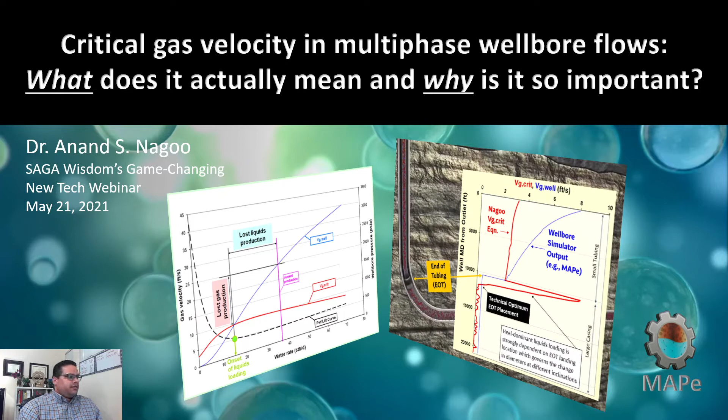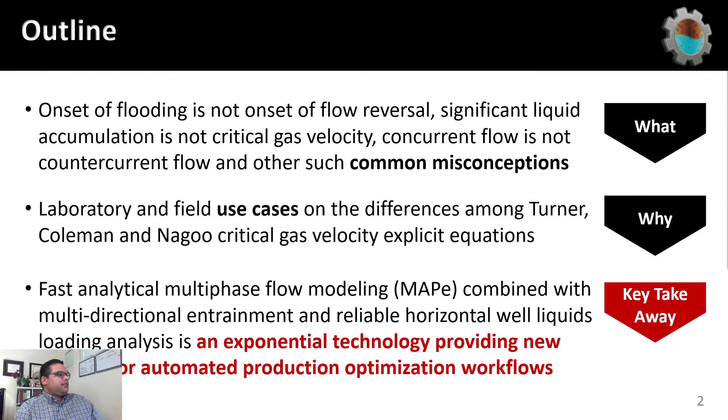For the first part of the talk, I'd like to focus on some common misconceptions about critical gas velocity, then transition into why this improved understanding is important, and conceptualize and validate our understanding with some key experiments and field data validations. Finally, I'd like to introduce you to the tool that does all these calculations of multi-phase flow, production calculations, critical gas velocity and so on, the MAPe tool, and why it's an exponential technology for providing new insights into production optimization workflows.

I often like to step back and look at the prize of what we're trying to do here. In production engineering, we think about this world in terms of the latitude and longitudes of pressure and flow rates. What we're really after is finding that pressure profile along the well, those individual multi-phase flow characteristics along the well. Particularly in unconventionals, we're interested in things like slugging, critical gas velocities, holdups and so on.

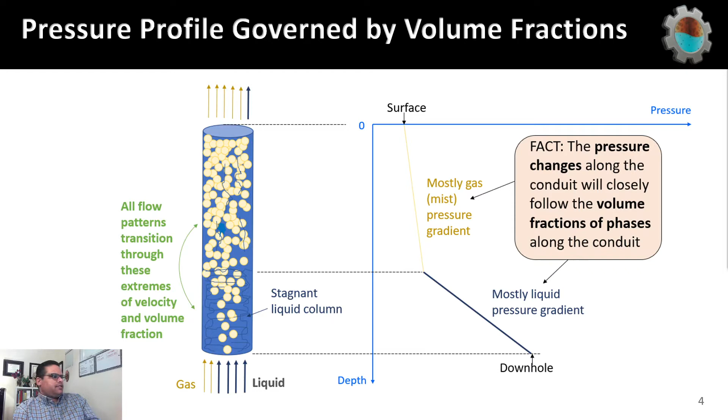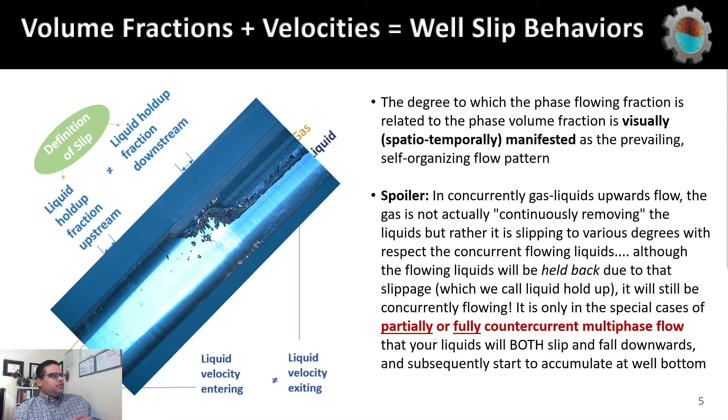But if you think about what the pressure profile in a well really is, it's nothing more than a representation of what you have in the well, the volume fractions of the phases. All your flow patterns are just different manifestations of that. So the pressure behavior is governed by the volume fractions, and the volume fractions together with the individual phase velocities, that relationship is what we call the well slip behavior. That's the key thing causing you to see different flow behaviors in the well, whether it's slug flow, annular mist flow, and so on, and that's visually represented in the type of slip that you have.

Now the problem is there's a misunderstanding, in my view, of what's actually happening. When we think about concurrent multi-phase flow, the gas is not actually removing the liquids. What's actually happening is there's constant slipping between the gas and the liquids to various degrees, which we call different flow patterns, and we call that holdup. The liquids are held back due to that slippage in concurrent flow. But in countercurrent flow, when you have partial or full countercurrent flow, you have both slipping and liquids falling back downwards. That's a key difference, because you need a deep understanding of the two different types of wellbore slip behaviors, characterized by concurrent flow and countercurrent multi-phase flow.

This is really where we must start to understand critical gas velocity, because you cannot truly understand the concept of liquids flow reversal without understanding the differences between concurrent and countercurrent multi-phase flow. There's a large body of literature on both, but we tend to see more of the concurrent part in the petroleum industry, and this is what has always been missing before, a key source of misunderstanding.

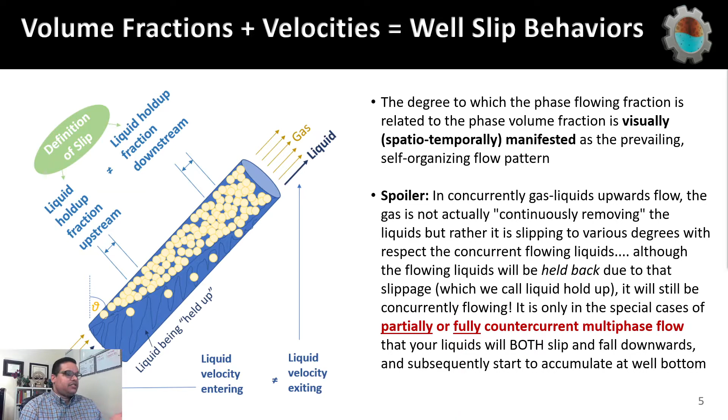When we talk about concurrent or countercurrent multi-phase flow, we're always talking about liquids accumulation. But in concurrent multi-phase flow, liquids accumulate in all sections of your well, and you have this phenomenon of liquids being held back due to slippage. So you have liquids slipping but not falling, with both a positive liquids rate and a positive gas rate concurrently, and that's how you develop a holdup profile.

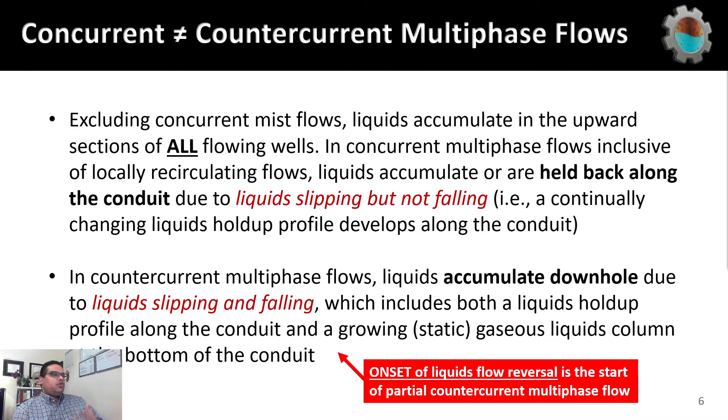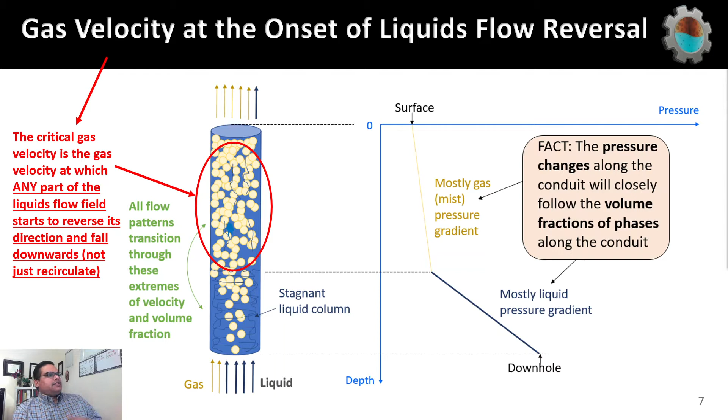So now that we understand that, we can finally come to an accurate definition of critical gas velocity, which is a gas velocity at which any part of your liquid's flow field starts to reverse direction and fall downwards, not just recirculate. So we're talking about falling downwards, a gas velocity at the onset of liquid's flow reversal. But even that is open to interpretation, because what are you talking about? What do you mean any part?

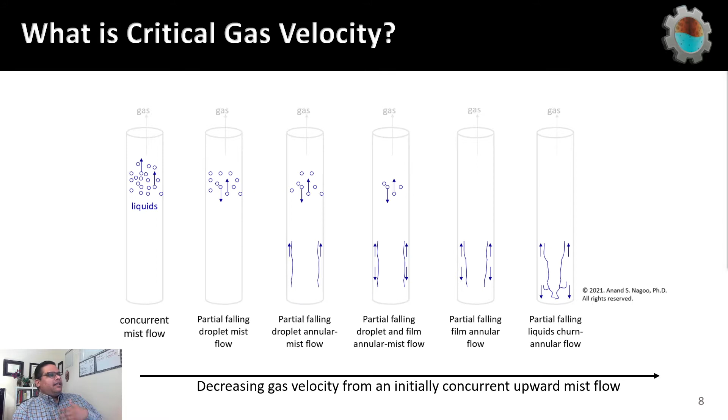If we start from a concurrent mist flow and we start decreasing the gas rate, we're going to countercurrent multiphase flow in many different ways. And the question is, are we talking about a partial fall in droplet mists? Are we talking about partial fall in annular? Are we talking about a mixture between? And the answer is the critical gas velocity is all of the above.

It's a range. Contrary to popular belief, it's not a departure point, but a range, a wide range. It includes all of the starting options for countercurrent flow. And the critical gas velocity depends on the different types of wells that you have. So, for example, a high GLR mist flow well will flow in this regime, but a liquids-rich gas condensate would flow in a partial churn annular flow regime.

And the critical gas velocity is the onset, that point just before you transition to your zero cross-section average net liquid velocity. And then your liquid starts to have a net zero velocity, a net negative velocity. And all of this happens in multiple ways across a wide range of different transitional flow patterns.

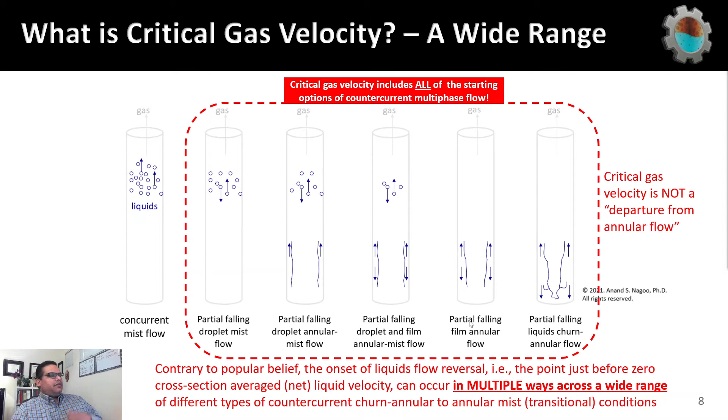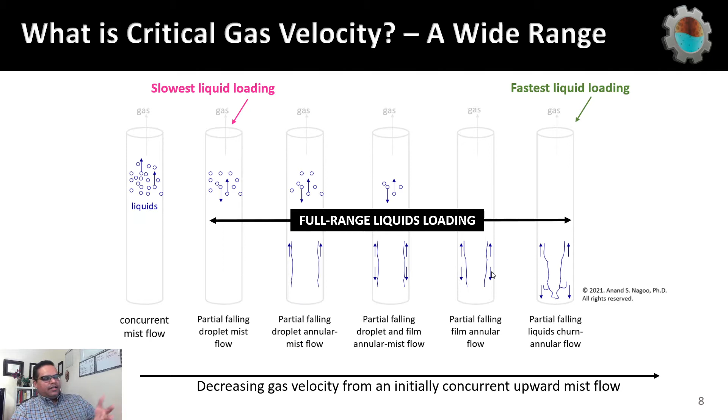That's important because now we can finally understand why we have slow liquid loading in some wells, and why we have sudden, fast liquid loading in other wells. That means we're accounting for the full range of liquids loading, an important term because it's an important differentiation into what we understand by liquids loading. So it's not just about what happens in a Turner analysis, or what happens individually in a film analysis, but it's the full range of this wellbore behavior.

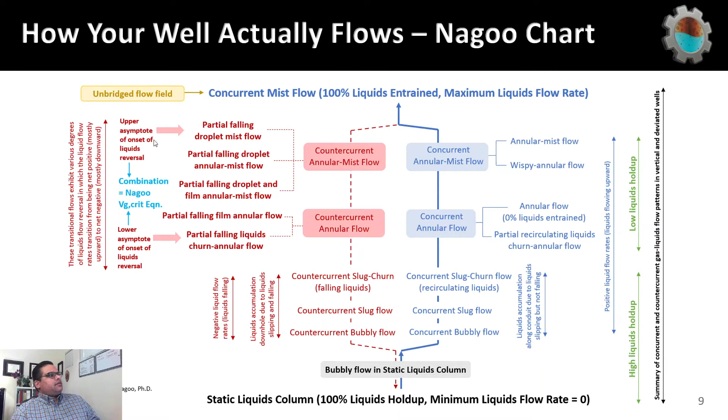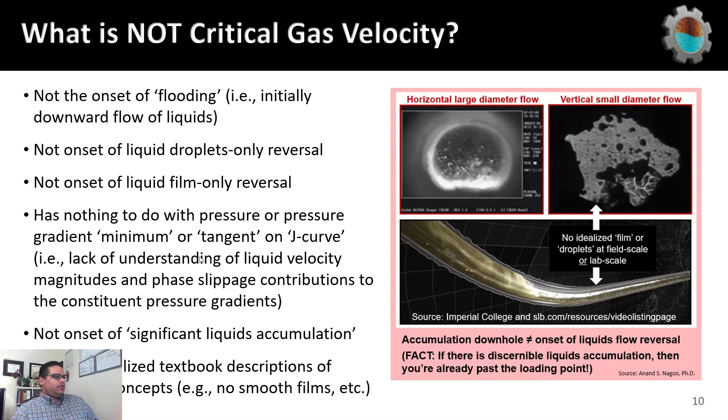The difference in the understanding that I created in the critical gas velocity model I have is that we're able to combine that full range. We're able to capture that full range and look at the upper asymptote of liquids loading and the lower asymptote, and combine them. So now that you understand what liquid loading is, you can clearly say what it is not. It's not the onset of flooding. It's not the liquids droplet only. It's not the liquids film only. And it has nothing to do with the change in pressure gradient curve or liquids accumulation, because once you have accumulation, you're already past the liquids loading point.

So now that we understand what liquids loading is and the onset of flow reversal in countercurrent multiphase flow, how do we conceptualize that understanding into a method, a calculation? That calculation is very important—one of the most important calculations if you're talking about the eventual removal of all of the liquids in your well, which is what the definition of artificial lift is. And I've been using this new understanding in my critical gas velocity equation, called the Nagoo equation, in many different ways.

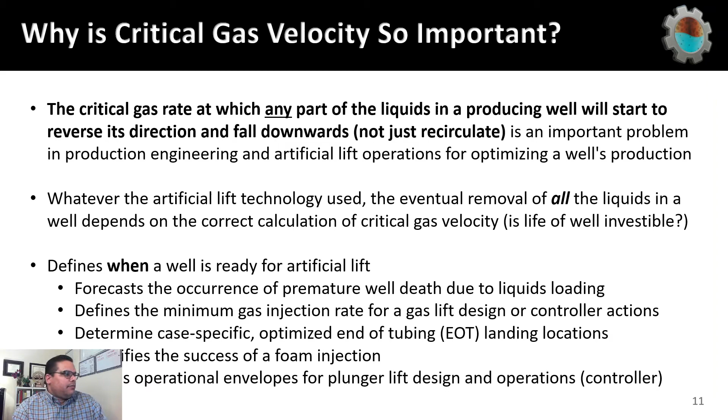I have new methods coming out for a virtual wellbore liquids meter that uses this calculation, a real-time plunger rise velocity tracking algorithm, slugging detector for automated gas lift, and so on. But the most important application that we should care about, the holy grail, is if we can predict early liquids loading detection and diagnosis.

Cost effectively managing your wells means that you want optimized remediation and intervention responses, in response to better quality and timeliness of liquid loading prediction. So the prediction needs to come before the remediation, not the other way around, which is where we currently are in terms of our understanding.

I could give you different broad figures. About 95% of your wells will need artificial lift, or 90% of your wells are liquid loading. But the figure that really matters is this: only 20% of your potential well life is going to be freely flowing, and the majority of your well life you're going to need to understand when and where you need to apply artificial lift. It's the deferred production that's the most costly part of your wells.

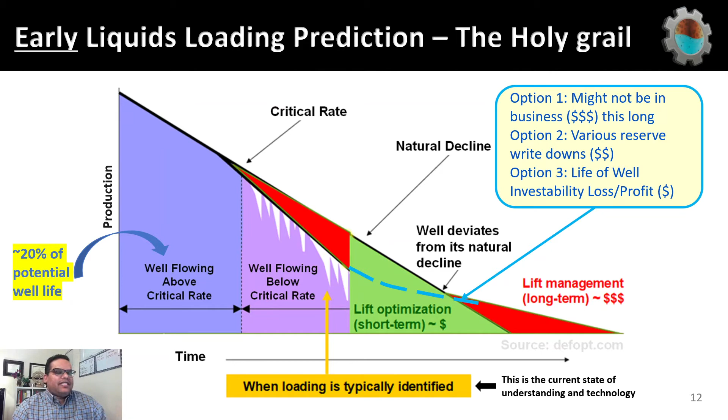If you don't get this right, there's a lot of problems. You might not be in business that long. Your investability equation might change, and you might have reserves written down.

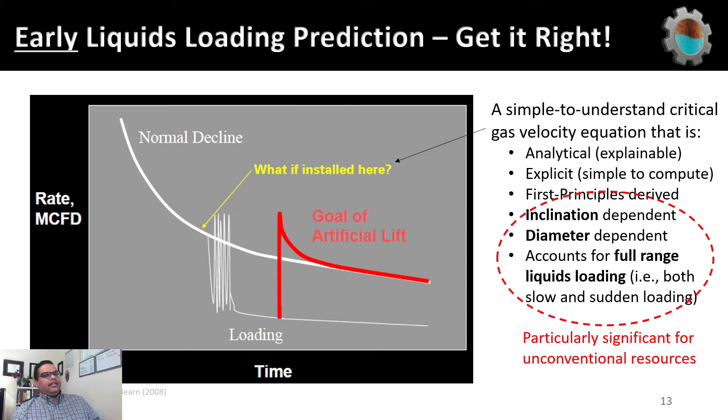It's something to get right because we don't only want an analytical, explainable, simple, first principle derived model, but more importantly, we want an inclination and diameter dependent model, and we want a liquids loading calculation that predicts early liquids loading that includes the full range of liquid loading. Those things are particularly important for unconventional wells.

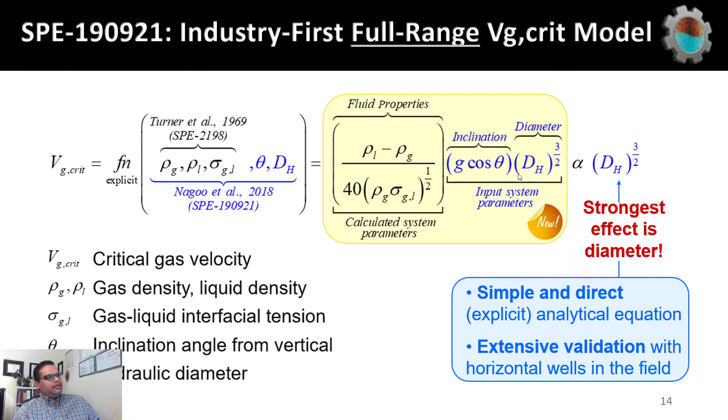That brings me to this equation, which is the key new equation that I came up with, along with many others. It's a collaborative study, SPE 190921, and it's the industry's first full range liquids loading model, and to my understanding, the only full range liquid loading model that has explicit dependencies on diameter and inclination. It turns out that diameter is the strongest effect. It's well validated against many shale unconventional reservoirs.

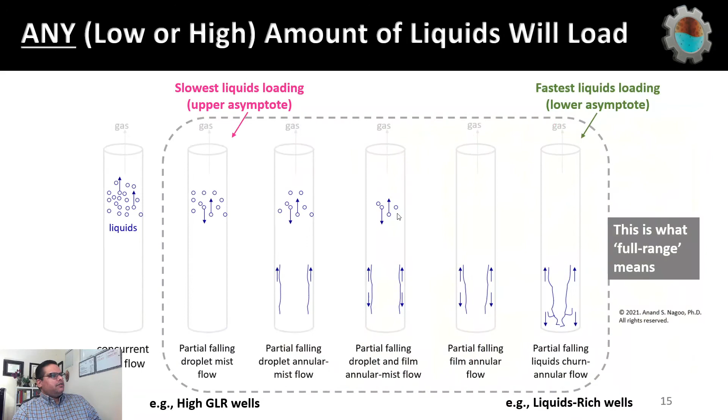When we talk about full range, again just a reminder, we're talking about all of this partial countercurrent flow, that onset of flow reversal. That's very important to remember because any amount of liquids will load a well, not just a lot of liquids or a little bit of liquids.

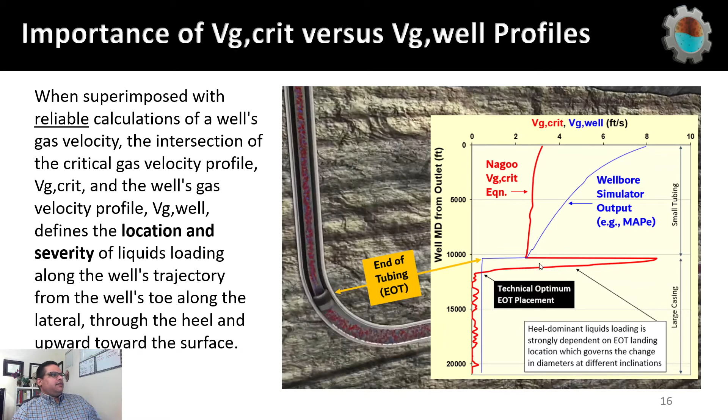For example, you now have a technical, quantifiable, explicit calculation of where your end of tubing should be from a technical standpoint, not necessarily from an operational standpoint. You begin to see which different parts of your well have liquids loading, and that complex interaction between the fluid dynamics around the bend and so on.

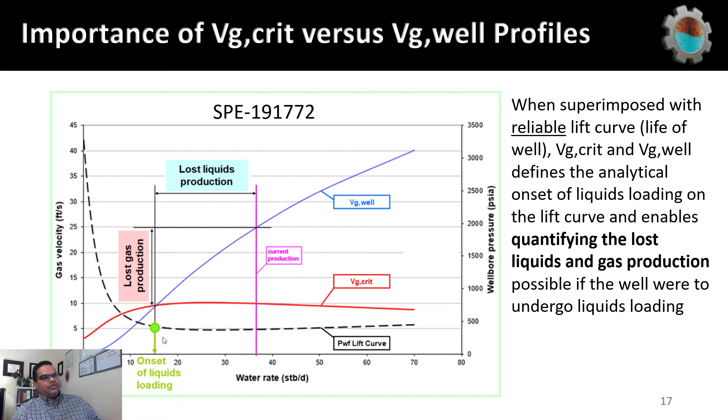And it's not just individually within the well. You can use this critical gas velocity and well gas velocity and plot it for the life of well. So you can look at your life of well liquids loading and calculate precisely on a lift curve where you have your onset of liquids loading, and therefore you can now quantify the lost liquids production and gas production that you can get if a well were to load.

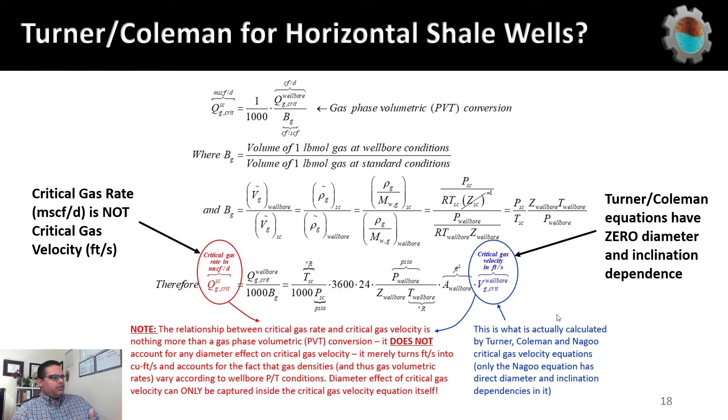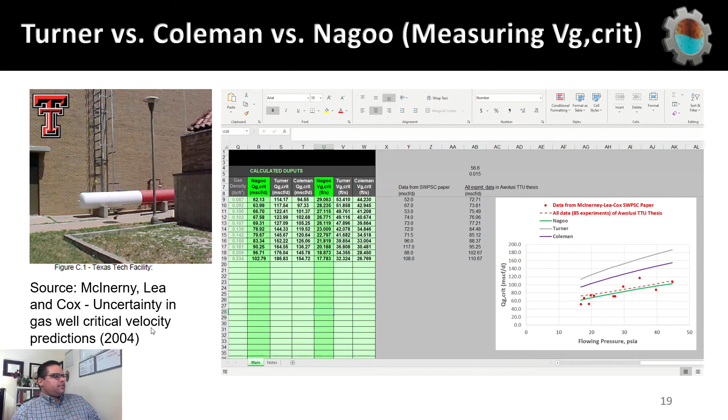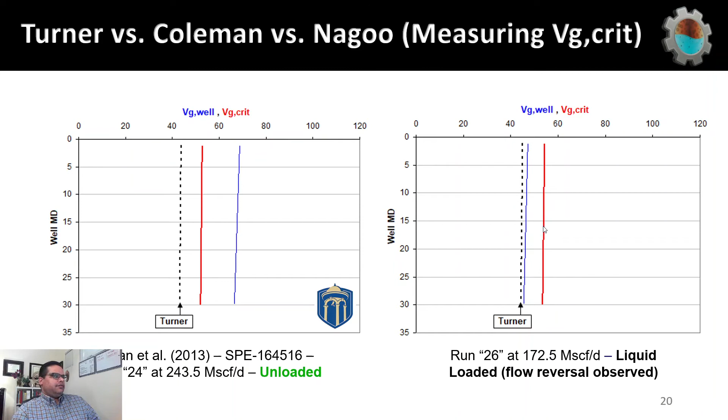You can clearly see a drastic improvement. Here's a University of Tulsa experiment where the gas velocity was systematically reduced until liquid loading was observed. If you didn't have the Nagoo equation, the red line, to correctly capture that liquid loading observation, you would still be above the Turner line.

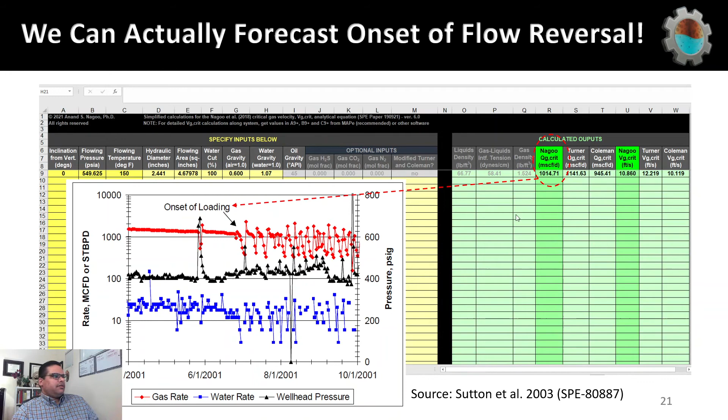Not just experiments, it's in real wells too. Here's a real well profile. In some cases, for example smaller diameters, you can coincidentally have the Nagoo and Turner equations coinciding—it's not much different, this is 1,000, this is 1,100, and Coleman will always be less. But the real value comes in when you can see significant differences.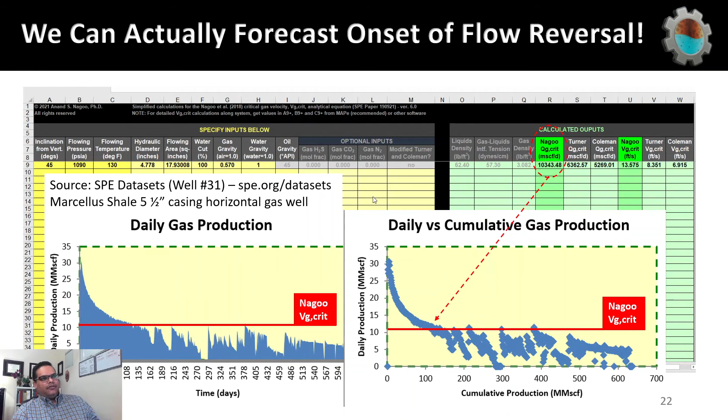So you can finally forecast critical gas velocity and the onset of flow reversal. And it's not just US wells—there's a lot of different papers, different types of diameters, sometimes very large diameters, where you can finally get this correct in terms of the actual observed loading.

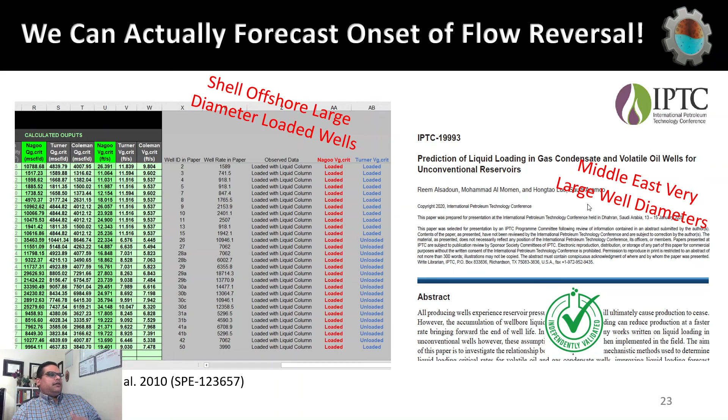There's a continuing effort—this is an independent validation of the Nagoo equation in an Aramco paper. Keep in mind there's also annulus multiphase flow types of validation as well.

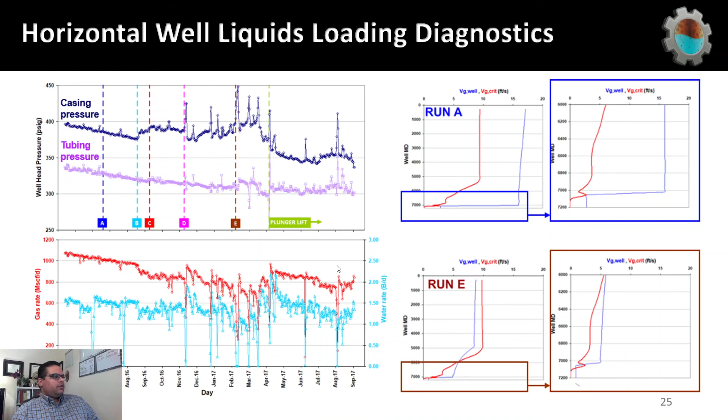So beyond prediction, there's diagnostics—you can diagnose what's going on downhole and see the differences between slight loading and severe loading.

In terms of remediation, you can apply gas lift. In this particular Eagle Ford three-phase gas condensate water well, the gas lift, when applied, didn't really solve the liquid loading and lateral loading.

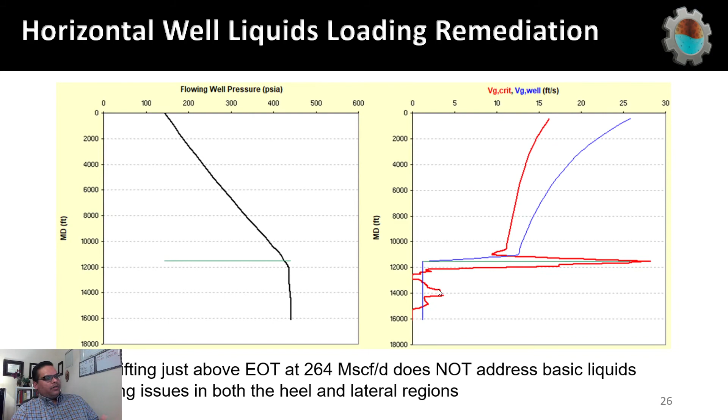And of course there's the end-of-tubing calculations you can make as well, so you can find out precisely at what angle your different critical gas velocity would matter.

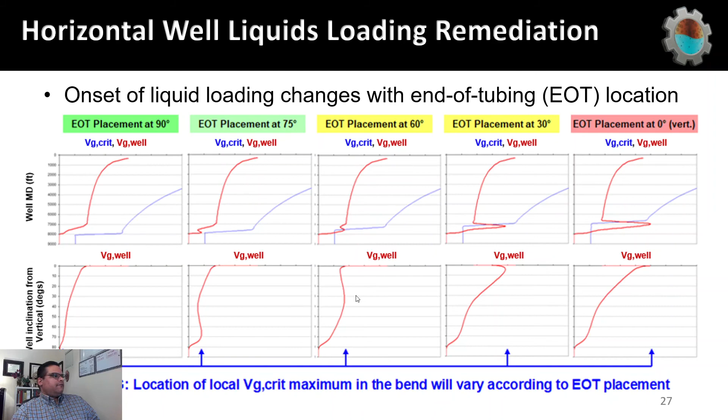My final portion of the presentation is to introduce you to MAPe. MAPe stands for Multiphase Analytical Prediction Engine. It's V7, the newest version, and there's a lot that's changed. In case you missed it, there's now the possibility to run thousands of wells, all these different wellbore simulations, very quickly.

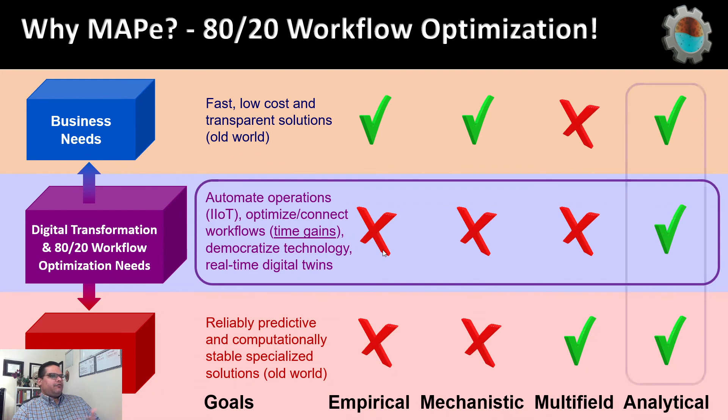MAPe is all about 80-20% workflow optimization. We used to live in a world where simple correlations or niche calculations were important, but now we live in a different world where the technology is only part of the bigger picture, and automation and the time gains from workflow optimization really matter—that's why you need analytical tools.

Automation means democratization as well. The difference between MAPe and other codes is that the VBA code is all open—it's a huge head start. You can think about it as the Raspberry Pi of production software.

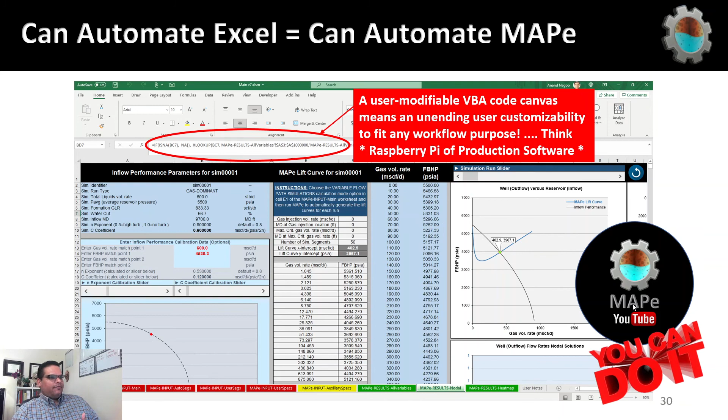It's a canvas. What I'm focusing my time on these days is making a lot of MAPe YouTube videos showing how to use these automated calculations.

It's important to keep in mind that yes, you can solve everything, throw the kitchen sink at it, and take a bunch of different wellbore models and combine them together. But if you don't understand what's going on a well-by-well basis, combining those things doesn't really add value—you actually decrease value.

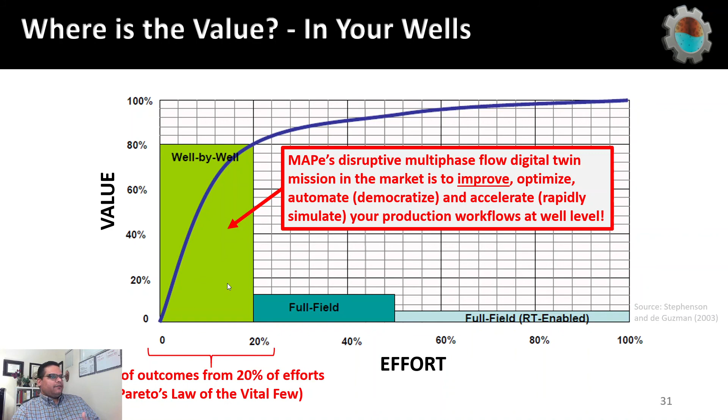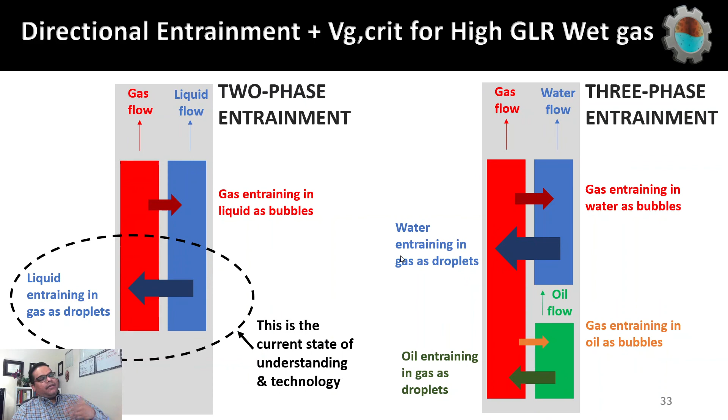So MAPe's disruptive mission is to improve, optimize, and automate production workflows at the well level. The improvement comes both from the fundamental deterministic theory, and in many cases MAPe's technology far exceeds what you have in the industry right now for individual things.

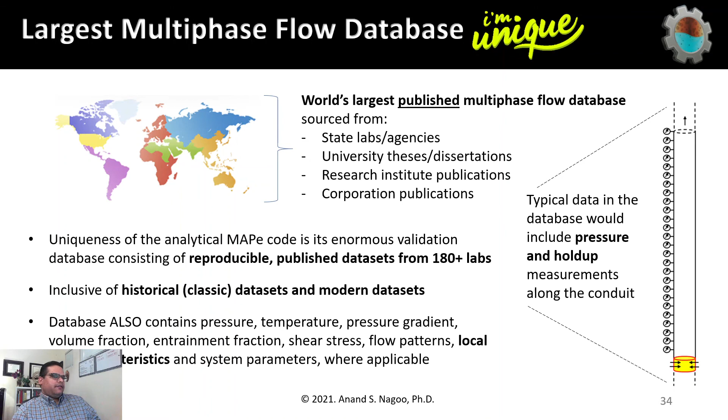It would be remiss of me not to mention MAPe also has a lot of unique things it's based on, including the world's largest validation database. So it's many individual things, incredible things, all coming together to make a disruptive advancement in analytical, automation-friendly production workflows. That, in combination with a much better understanding of critical gas velocity, is how we're going to have a baseline understanding for science-driven, data-heavy production optimization at the well level.